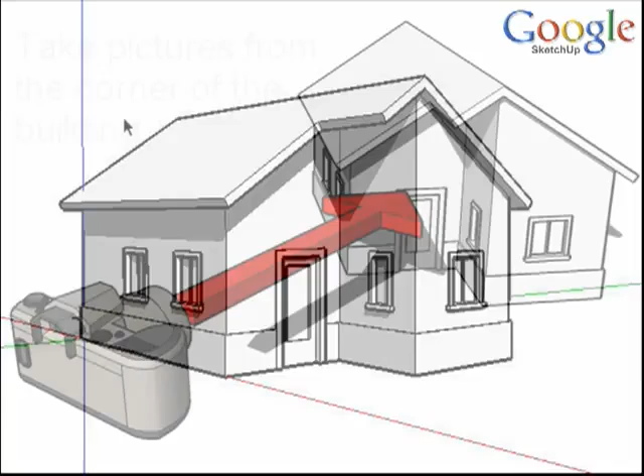When you're taking or considering pictures for Match Photo, be sure to follow these guidelines. Try to take the images from the corner of the building so you get a good view of both sides of the building.

Try to get a clear picture of just the building without trees or other visible obstacles in the way. Also, any image you use must not be cropped. Keep this in mind if you want to use images from a book or the web, as they probably have been cropped and might not work well.

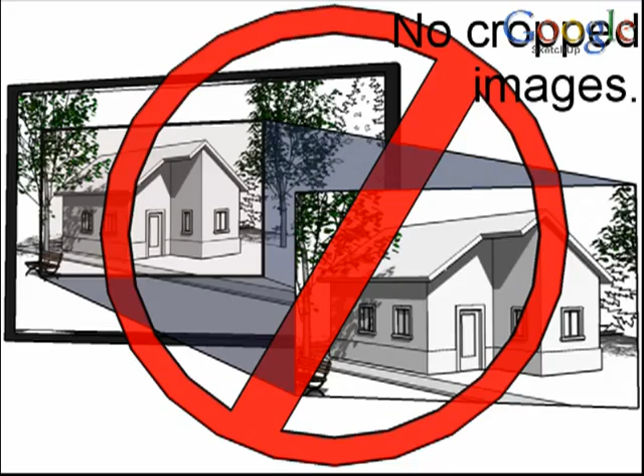Finally, when you do bring your image into SketchUp, try to line the axis bars up with elements on the building itself and not on the ground plane. Often the line where the building meets the ground isn't parallel to the rest of the building, as the ground slopes.

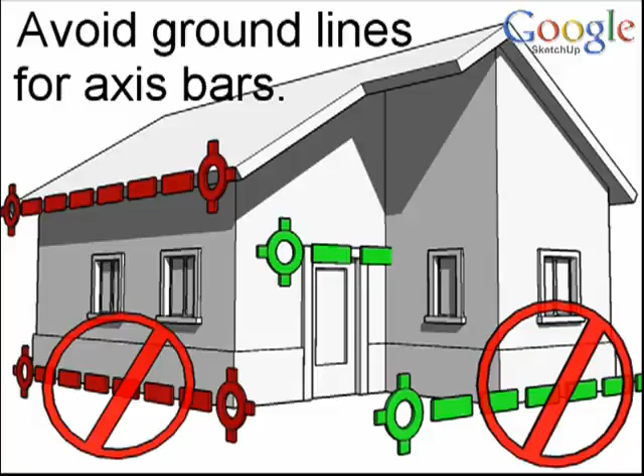With your picture ready, bring it into SketchUp. Again, this is simply using the Import option from the File menu. Make sure that 'Use as a new Match Photo' is selected and open the image.

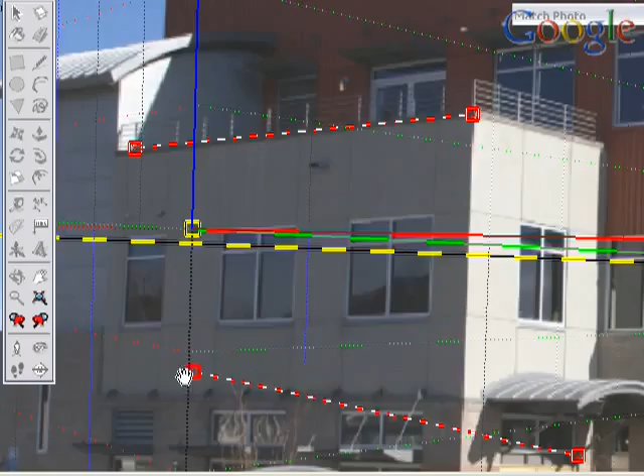As you saw in the last video, adjust the axis bars to line up with parallel elements in your image. Remember as well to place the axis origin at a corner or a meaningful place in your image.

Make sure to take advantage of zooming with the scroll wheel, as micro adjustments do make a difference with getting the best results.

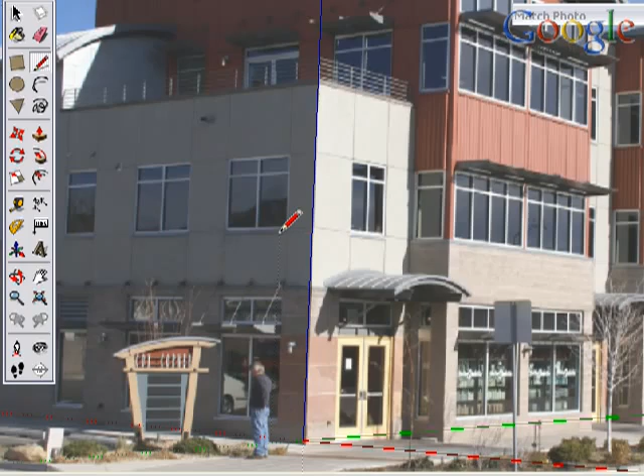With the adjustments made, right or context click and choose Done. Now start modeling over the image, remembering to work from the origin outward.

For example, I would start by drawing in this wall, and once it is created based on the axis origin, then I can go in and add detail to it.

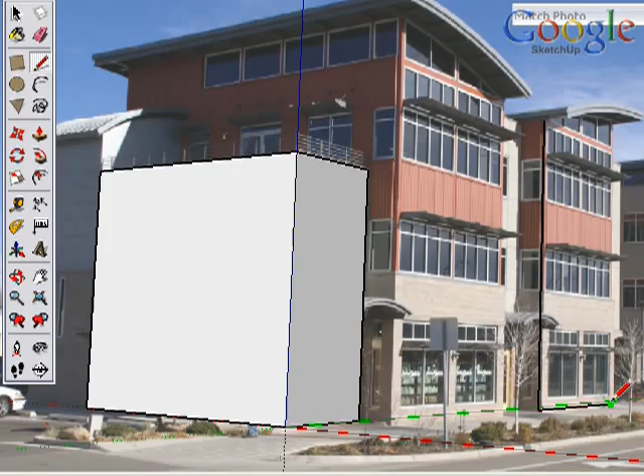However, if I started drawing a wall without any reference to the origin, even though it appears correct from this view, orbiting shows it is not.

Okay, let's fast forward on this model such that we have more of it built. Of course, we are limited by not being able to see and work around the corners. In fact, you can insert additional images so that you can turn the corners and keep working.

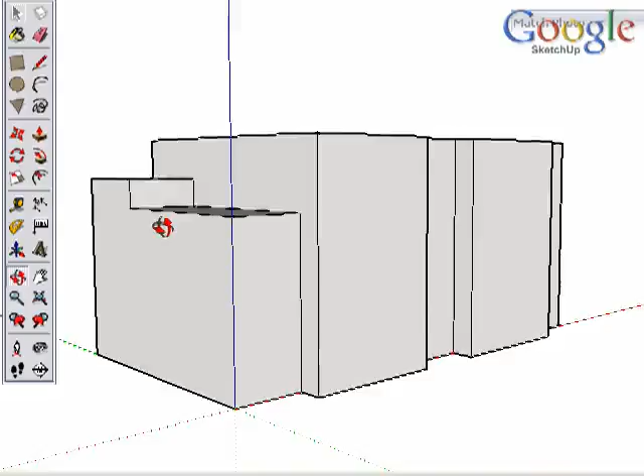Start by orbiting the model so it roughly matches the next image you will bring in. In our example, this is the next photo we will use. So orbit the building such that the view is similar. Now import the image for Match Photo.

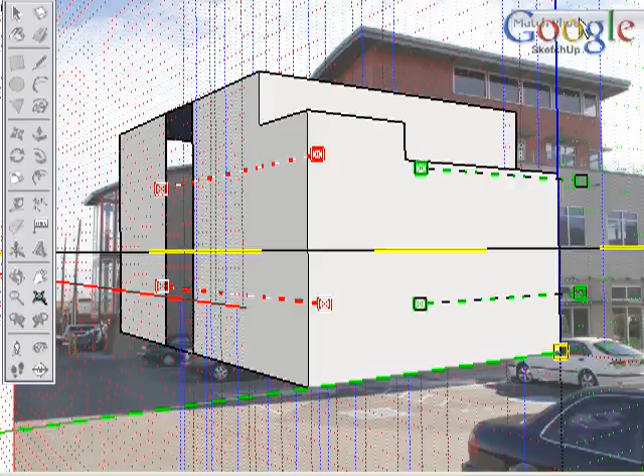Set up the axis bars to match the perspective. This is a good opportunity to toggle the model off in the Match Photo dialog box so that we can better see to adjust the axis bars.

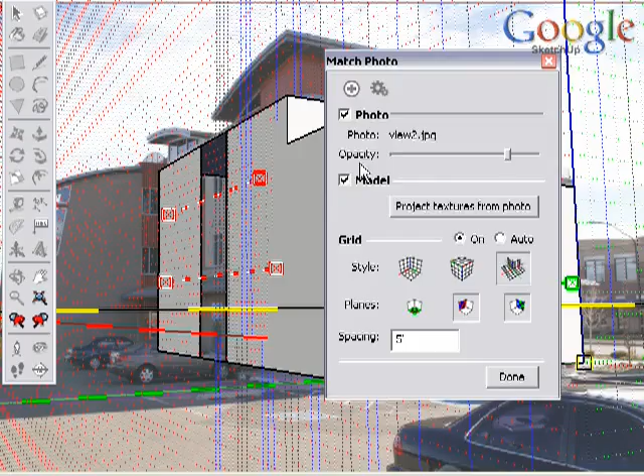Then move the axis origin to the same location that we had established from the last photo. It was here at this corner. Now toggle the model back on and you can see the orientation is correct, but the size is not.

Simply click and drag on a red, green, or blue axis to size the building. A few adjustments, and this looks pretty close.

Keep in mind that you want to try and match the model as close as possible to the image, but an exact match is rare, so don't be frustrated that it doesn't line up absolutely perfect for all aspects.

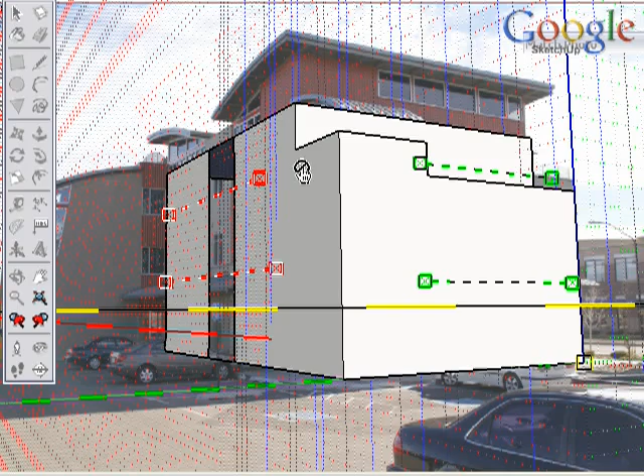Finish editing the Match Photo properties, and you can begin modeling again using this new photo for reference. Scene tabs are created automatically for any new image that you add, and you can cycle between them with ease. In this way, it's possible to combine many photo references to model from.

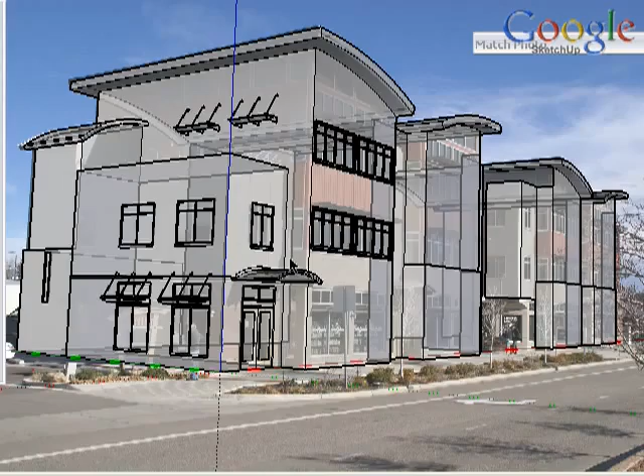Let's fast forward again to having more of the building modeled. Now select several faces, right or context click on one of the selected faces and choose Project Photo. Now orbit to get the full effect of what we've done. The actual photo image has been mapped onto the model.

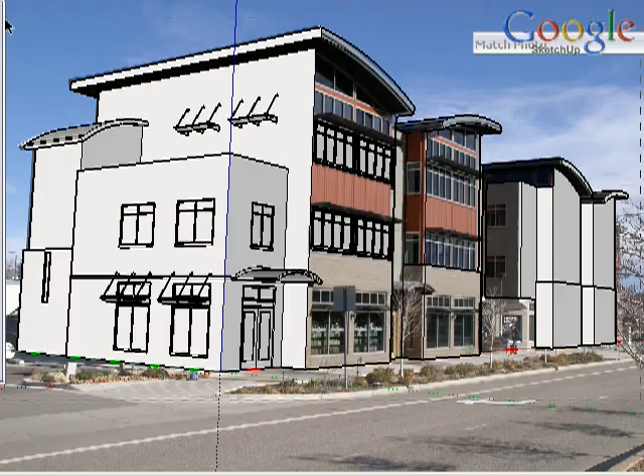That's pretty amazing enough for a few faces, so let's do the whole model. Click the Scene tab to get back to the photo view, select the entire model, right or context click and choose Project Photo.

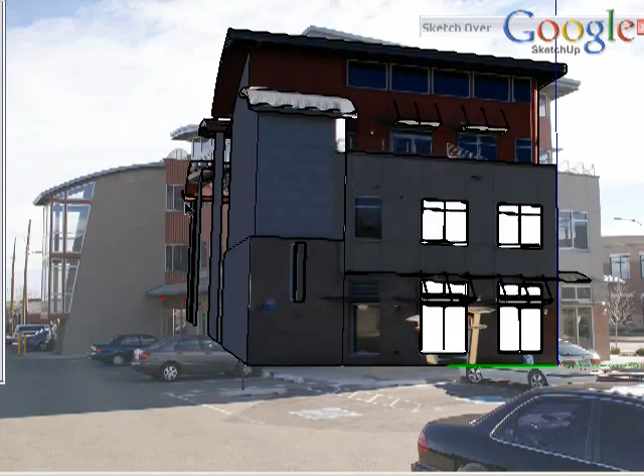Because the photo is projected straight to the model from this view, there will be areas, particularly around corners, where the photo won't match correctly to the model. But overall, this is a quick way to add a lot of texture to the model. If you've loaded multiple images, make sure to view those sides as well and project the photo there.

When working with additional sides, make sure to only select the faces you want to affect and project the photo.

A dialog box will appear if you are projecting a photo to a face that you already applied the photo to. As long as you've selected the correct faces, say yes to apply the correct photo.

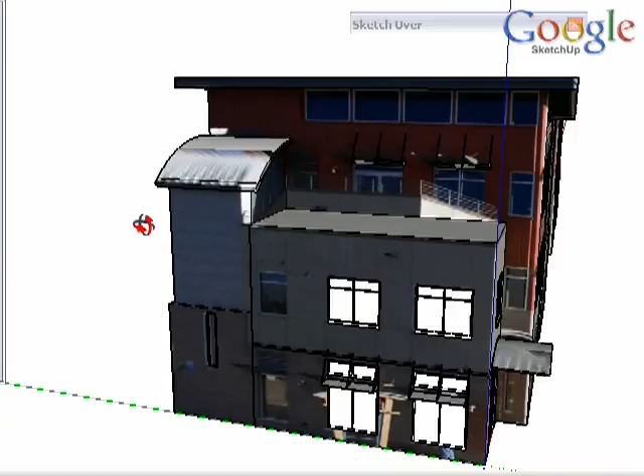We've been talking about how to create models from photos, but now let's switch gears. What if you are creating a new model and you want to put it into the surrounding context? So you want to see your model in a photo.

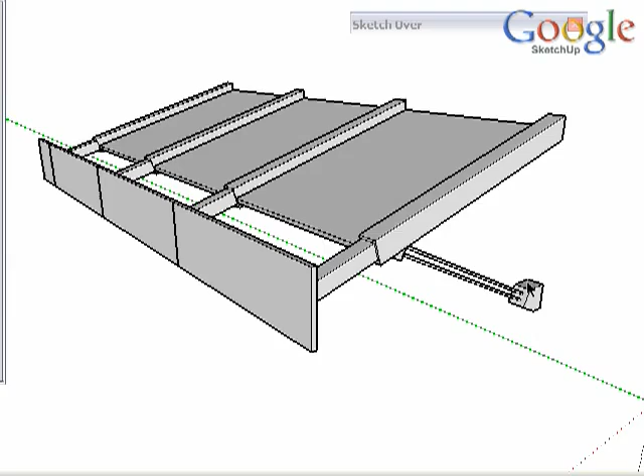Match Photo will do just that, and actually, you already know how to make it happen from what we've already learned. Take this example of an existing SketchUp model, and we'd like to place it in the context of this photo.

First, orbit within your model so the view matches the photo you want to use. Then import the image as we've done before.

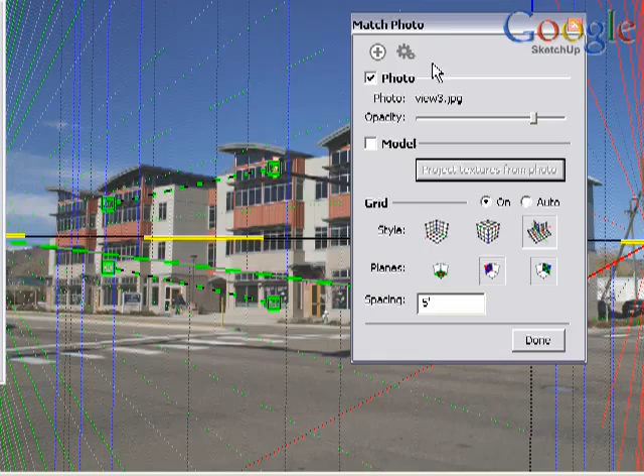Use the axis bars and align the perspective. It's helpful to toggle the model off for this step.

Okay, now that the axis bars are lined up, toggle the model back on and click and drag the axis origin of the model to match the photo. Click and drag on one of the axes to scale the model to the photo.

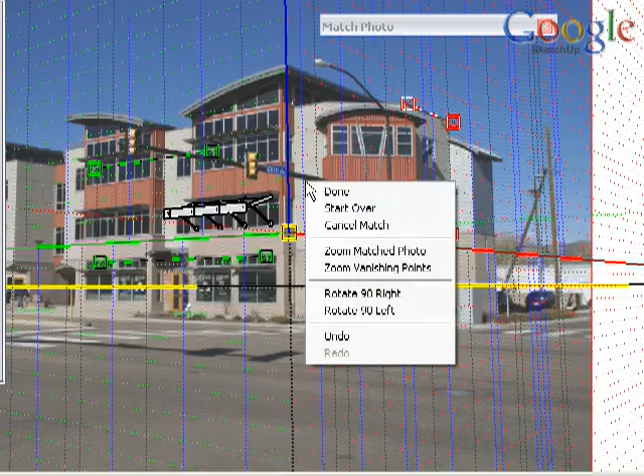And that's it. Right or context click and choose Done to finish. Now we can see our new project properly placed into its real-world context.